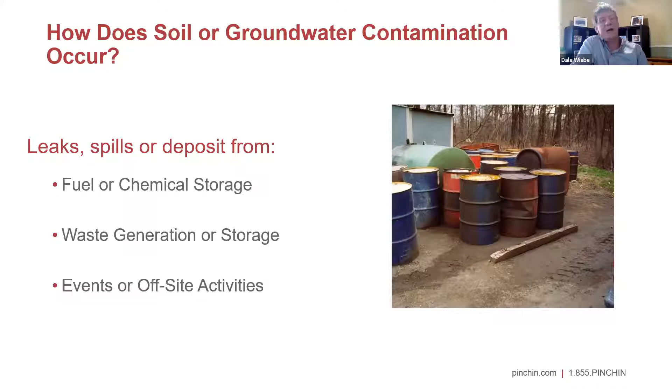Or it's even possible that there could be impacts due to events or offsite activities that aren't typically related to the historical property use, but still have a potential to impact soil or groundwater on the site.

It's not anticipated that every site is going to go all the way through this process. In fact, it's more likely that the vast majority of sites are only going to go through the first step, or maybe the second step, where they get screened out as sites that do not have the potential for significant soil and groundwater impacts. It's only those sites where that potential exists that will be subject to further assessment and further planning.

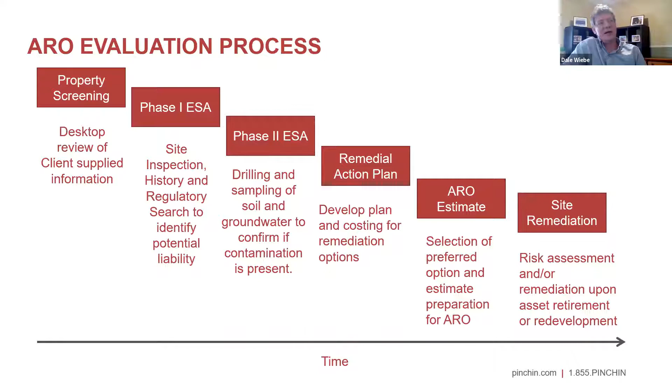As you can see at the bottom of the slide, the farther you go through this process, the more time and resources it actually takes to develop an ARO. But again, that's only going to be sites that actually have the potential for that contamination.

So the first step of that evaluation process is the desktop screening process. If there's a list of fixed assets that you have in your organization, based on all the information you have about those sites, based on property use, your development history, the location, and any other records that might be available for the site...

...the first question that needs to be asked is, is there any reason to suspect, based upon your records, the activity at the site, and the history of the site, that there's the potential for contamination of soil and groundwater? If the answer is no, then really no ARO would need to be assigned for this site. There's no reason to suspect impacts.

And there would be no recommendation to go further through the process. If there is the potential—based on, maybe the development history of a property wasn't known prior to your acquisition of it, maybe there's been some historic activity at the site that does raise the potential for some contamination—then the recommendation would change to yes, and it would go to the next phase of the process.

That next phase is a Phase 1 ESA. Now, the Phase 1 ESA process—Phase 1 is a standard due diligence document.

There is a standard for what comprises Phase 1. The principal components are an information and records review that is much more extensive than the desktop screening, because this involves going to historical records, regulatory databases, regulatory records, and really trying to identify all the pieces of information that might be used to paint a picture of the historical operations and the environmental conditions of the site, going back to the time of its first development.

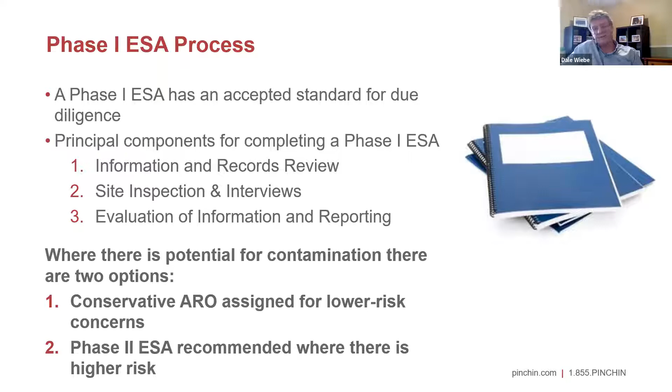So when we talk about risk factors that increase the risk for potential ARO in a property, what are we talking about? We have to ask ourselves some fairly straightforward questions. First off would be, what's the nature of the contaminants that were identified in Phase 1? Not all contaminants are created equal. Some readily move through soil and groundwater a lot easier than others, potentially representing a larger risk for more significant impacts. Some can contaminate soil or groundwater even at very low concentrations, so they also represent a higher risk.

Then there are questions about, well, okay, if these contaminants or chemicals were present on the site, what is the potential that this got released to the environment? That might open up other questions, such as how long was that activity or that storage present on the site? How was it handled or stored? Based on similar sites, generally a consultant will be able to tell you, based on experience, that this type of storage or activity generally results in the potential for release to soil or groundwater.

Another question might be, what is the potential severity if there was a release? So if there's concerns that are very close to, say, the property line or very close to a building, that would elevate the risk, because the potential for liability for offsite migration, or the liability that it could affect the operation of the site building, would elevate the risk and further move it down the process for developing an ARO.

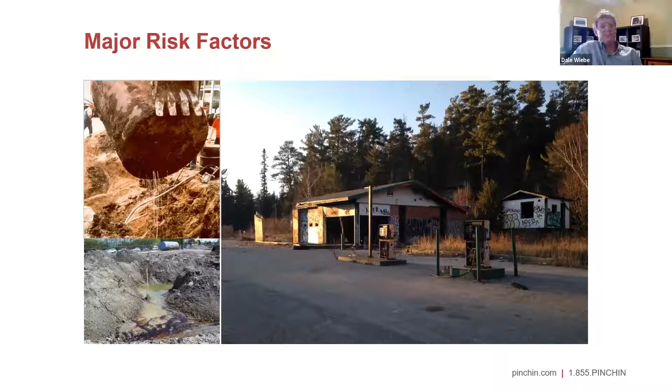So one of the activities that tends to be very high risk is fuel storage and fueling on the site. And one of the highest risk aspects of this is the UST, or the underground storage tank.

One of the reasons these are considered high risk is generally because an underground storage tank is a buried tank. Small leaks, spills, or overfills of a tank that's buried underground are not going to be readily visible to anybody on the site. So these leaks have the potential to go for extended periods of time if they did happen.

They also contain fuel, and this fuel is a high risk contaminant. It passes readily through soil and can impact groundwater, and a fuel tank can generally impact a fairly significant area and represent a significant liability.

So for an underground storage tank, I've got some photographs up on this slide, and this is a public sector building where there's a heating oil tank that had been left on site as an obsolete tank. It wasn't in use, and you can see the natural gas connection that serves as the heating fuel for the building and has for decades, but the original tank was left in the ground.

This is not as uncommon as you otherwise would think. In fact, when we investigated this tank, it was partially full of fuel and partially full of water. That's generally a bad sign, because if water is getting into your tank, that means fuel can also get out of the tank.

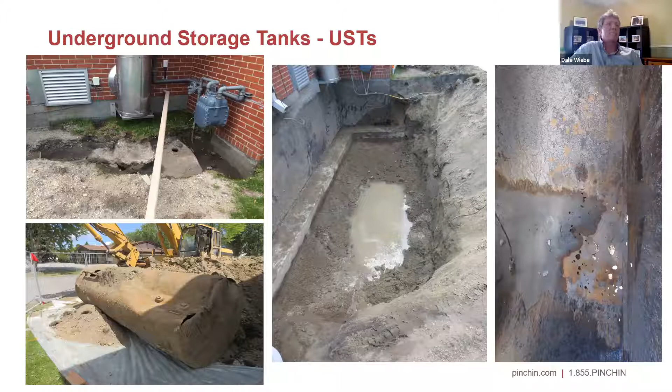So chemical waste and storage. Chemical storage and waste storage today is a much different process and is regulated and handled by industry much differently today than it was historically. Today, the containers, labeling, manifests, inspections, and general storage methods are much higher standard and have a much lower risk of potential release of impacts to the environment.

But unfortunately, historically, that wasn't always the case. Prior to there being environmental regulation for those contaminants, or any type of protocol for how those chemicals and waste needed to be stored, there was a very high potential for release to the environment, to soil and groundwater.

And the more chemical or waste storage that would have been present at the site, so the longer that operation may have run, or the greater the volume of waste that would have been stored, the higher the potential risk would be.

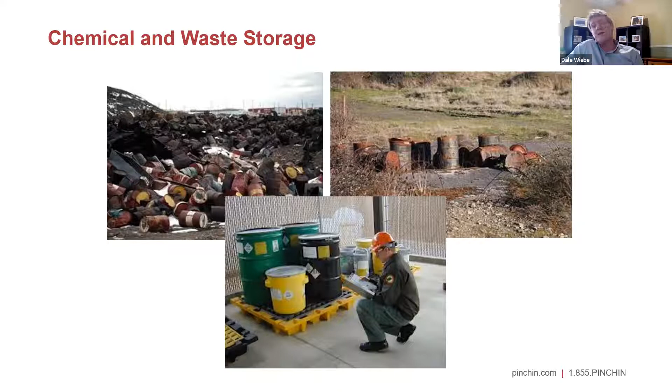During a phase 1 site assessment, there would be a site walkthrough, and one of the things the assessors would look for is staining on the ground or evidence of stressed vegetation. These can be telltale signs of potential release of contaminants to the environment, and if encountered by an assessor during a walkthrough, it's something that could get flagged for further investigation.

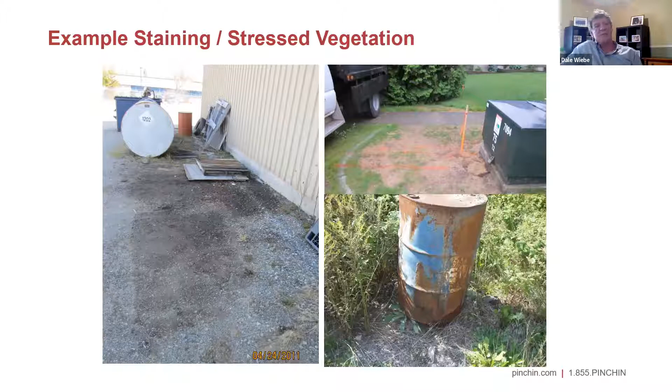Above ground storage tanks contain fuel and are very similar to underground storage tanks in that fact, but above ground storage tanks are lower risk because they do not have the potential to release underground. They would have to basically leak to the ground surface, which is easier for people to observe. We would generally look for pathways for those fuel tanks to possibly reach the ground surface.

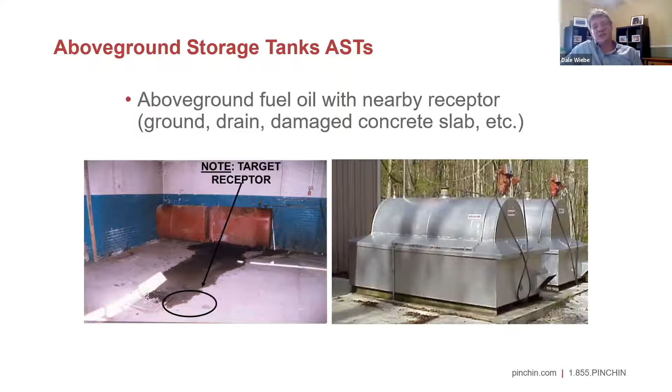So with these risks, we would then look to do a phase 2 ESA. The phase 2 is the actual sampling of the site, to confirm if contamination is actually present. And once contamination is confirmed, it may require more sampling to determine how much of it is there, and to determine the extent and severity of the contamination.

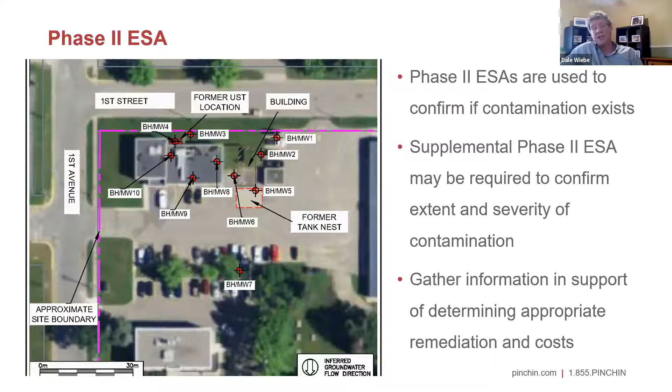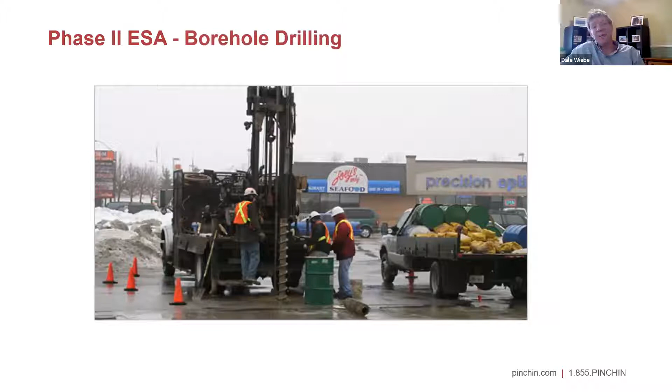We also use it to gather information in support of determining appropriate remediation strategies and costs. Methods for a phase 2 would involve borehole drilling, essentially mobilizing a drill to site, pulling up soil and sampling it to send to a lab to determine condition.

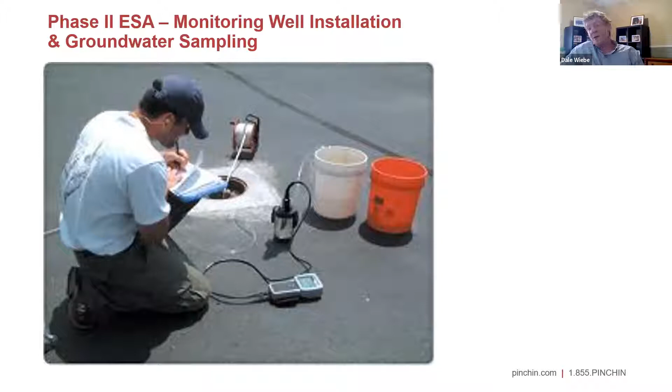With the borehole drilling, we could install groundwater monitoring wells. This is a screen and casing that goes inside a borehole, allowing water to enter the well so it could be pumped out and sampled, and the water quality can be determined.

And possibly even test pits. Test pits are a little bit more disturbance, and you need the correct site to be able to accept putting a 3-foot wide excavator bucket into the ground.

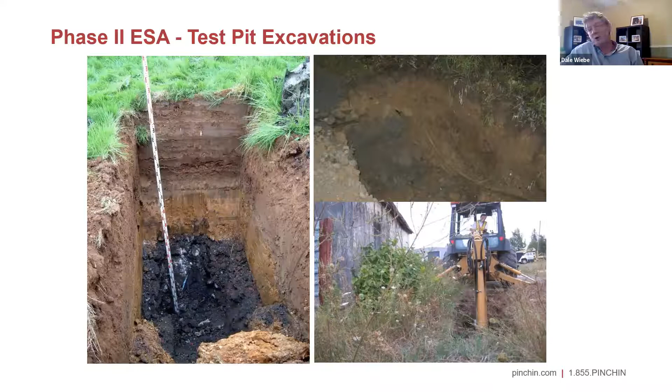You might not want to do that when it's built up with asphalt and concrete, but if the site is appropriate for it, it's a very cost-effective way to do a shallow soil investigation.

So once we've confirmed and determined the extent of impacts, when we're planning a remediation, we want to take certain factors into account. One of those obviously is going to be the total cost of doing the remediation or cleanup.

The potential disturbance to the site that cleanup would involve, this whole time frame of the project, as well as future redevelopment plans for the site.

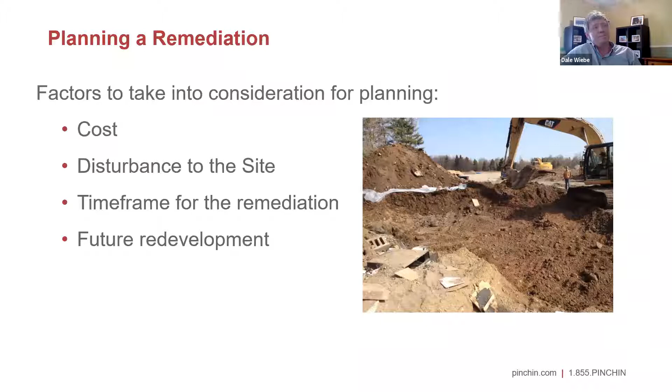So the methods of remediation or remedial strategy: ex-situ means off-site. It's essentially the excavation of impacted soil or groundwater, removal of the material off-site and bringing in fresh fill to replace it.

It's the most complete solution, but it's not always the most practical, because if the impacts are close to buildings that are on site or general site improvements, it may not be practical to try and excavate out all the soil that might be beneath it.

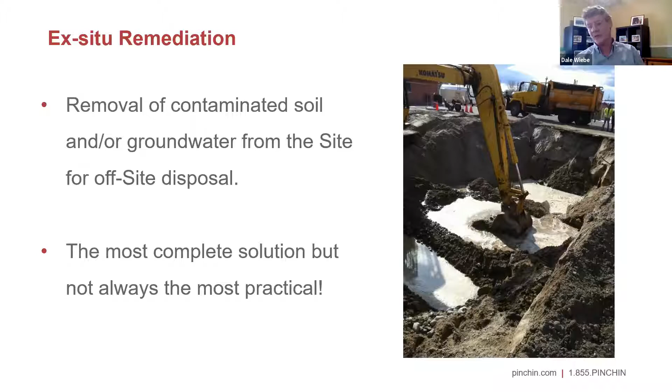Alternatively, in situ means on-site remediation and monitoring. There are natural processes through biological or chemical degradation of contaminants that can lower the contamination level over time.

That's called natural attenuation, and Mother Nature does it naturally, but we can accelerate those processes through bioremediation or chemical injection. This will greatly shorten the amount of time compared to natural attenuation, but it's still a much longer time frame when compared to ex-situ remediation.

But in the end, it might represent a lot less disturbance of material on the site.

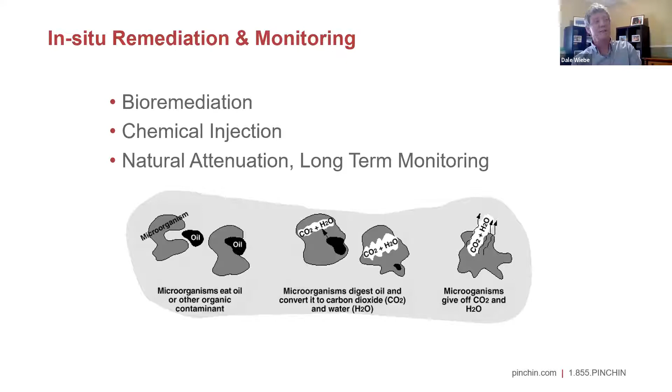And then there's the option for the risk assessment. Going back to the very first slide, I said the standards were developed using a risk-based approach. Those risk-based approach that develop the standards are what's called generic standards. So they don't take into account the depth of impacts or whether it's under the parking lot or under a building.

A risk assessment compiled by a qualified risk assessor can develop site-specific criteria for the property that might allow impacts to stay perfectly well in place, and you may not need to do any intrusive remediation.

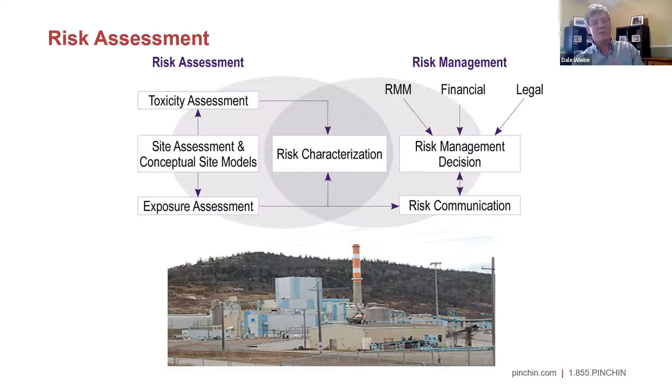And that's all I have for the presentation today. Thanks, everyone.

All right, good afternoon, everyone. Tim McBride, and I'm here to talk to you today about closure and post-closure liability relating to landfill and waste disposal sites.

One of the things we've noticed recently is there's been a real shift in people's thinking regarding landfill sites. And I would hope that your organizations are sharing this trend that we're seeing.

We're getting away from the fact that people just think that this is a dump, and people are starting to look at it as an asset.

And I think part of that is because the realization is becoming apparent to people of what's involved in trying to get a new landfill site, and some of the challenges and the time constraints that go into that sort of thing.

So really, there's been a big movement now for people to optimize their landfill sites and try and maintain them in such a way that they are working towards a closure plan that is a little bit easier on the pocketbook.

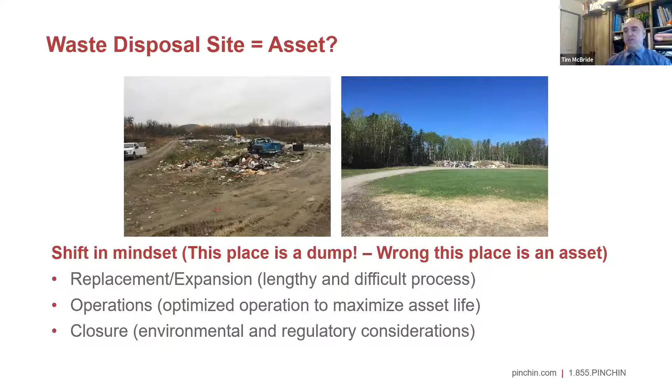And at the same time meets all the regulatory requirements and minimizes the impact to the environment as well.

One of the things we recently did was a feasibility study for a small community of about 3,000 people. We were trying to figure out the best waste management option for this community - whether to invest money in expanding their existing landfill site, try to get a new site approved, or abandon it altogether and look at hauling waste to an adjacent community. In doing that exercise, we pulled up stats on what we think people generate, and typical tipping fees, to develop what it would cost per person per community per year.

We figured that disposal alone would be $60 per person per year. So for a town of 3,000 people, that equates to $180,000 in tipping fees a year. If you have a landfill site with a considerable lifespan remaining, or conversely you didn't have a landfill and had to ship waste off site for disposal elsewhere, that could be a considerable investment - you'd have to expend a lot of money to deal with your waste disposal.

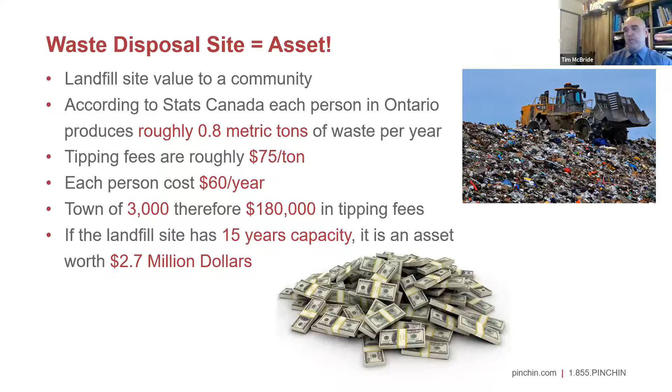In light of that, a lot of people are starting to realize the value of their landfill sites, and they're starting to treat them a little bit better. So in order to figure out your closure costs and post-closure liabilities, you have to have a good understanding of where your site is today.

Most sites have some sort of limitations placed on them, whether that's a limit on the amount of waste you're allowed to receive by volume, or sometimes it's an areal extent - you're only allowed to have a waste footprint of 2 hectares, for example, and most of the time that'll be specified in your license. Sometimes sites have other restrictions too, where you have an approved footprint but there's a limit on your waste height, due to visibility from adjacent properties or other influences, which would have been wrapped into your approval process.

The other aspect is that there's usually design criteria within your regulations - side slopes will be specified at, most jurisdictions being 4:1 with a 20:1 crown on top. So if you have a designated landfill footprint, those design criteria really dictate how much waste you could fit in there. What we like to do is figure out where we're at today, shown here as this green line, get an idea of what our approved landfill cap or volume would be, and what's the available airspace remaining. This particular example is actually a proposed expansion, so we could figure out how much additional waste we could get and convert that into years of life.

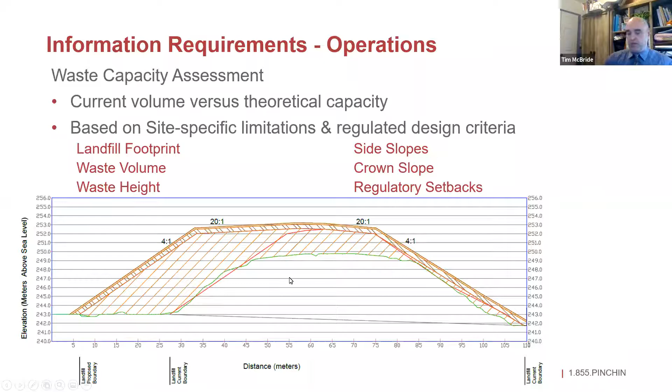One of the ways we do that is through annual topo surveys. Lots of sites have scales, and that's all fine and dandy, but the weight you bring in doesn't always translate well to in-place volume. So if your site doesn't receive a lot of waste, we wouldn't do it annually, but we do frequent topo surveys, and using that we can calculate what your average waste deposition rate would be.

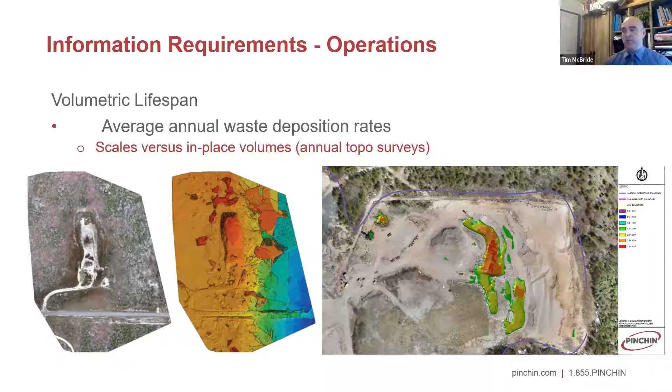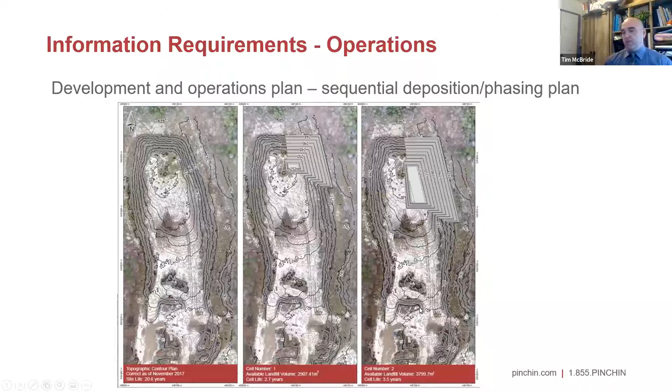Then what we'd like to do is develop a development and operation plan for the site, which helps us figure out a way to maximize or optimize the available airspace left in the landfill site. This is an example of the current site condition, phase 1, phase 2 - there's a method to how we develop the landfill site so that we can cap it as we go along and optimize the amount of waste we put into the site.

Combined with the annual topo surveys and the available airspace developed through the waste capacity assessment, we figure out the lifespan of the landfill based on volume. The other important component is the contaminating lifespan of the landfill site. Similar to what Dale was talking about, where you have contaminant sources, the landfill itself is a huge contaminant source. As precipitation falls and infiltrates through the waste deposits, you end up with leachate generation, and that leachate generation follows the groundwater flow direction.

Either your site operates as a natural attenuation type site where it flows and dilutes itself, and other hydrogeological processes occur and manage the plume, or you would have a leachate management type facility where you would pump it and treat it.

The default contaminant lifespan for most jurisdictions is 25 years post-closure. So even once you're done with this landfill site and you put a cap on it, you're not done with it. You still have to carry out the post-closure period for a minimum of 25 years. Often we run into sites where the contaminating lifespan exceeds that 25-year period, and we have to account for that.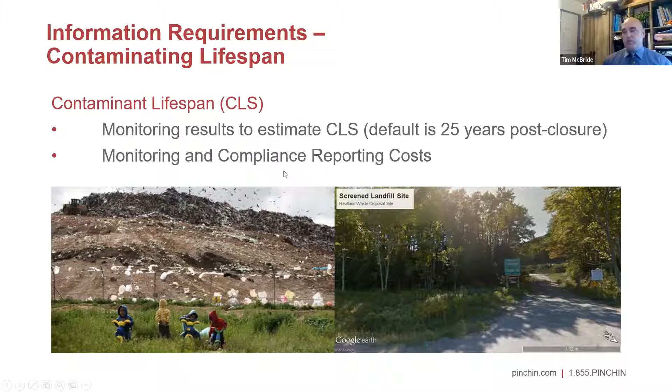So the last piece of the puzzle is the closure concept. Once we understand the asset and the life of the asset, what is our strategy at the end of the game to close the site? Most jurisdictions require you to apply some sort of impermeable cap on top of the landfill site and then vegetate it as well.

The other financial aspect that's really important is if you progressively close your landfill sites as you finish the cells in accordance with the sequencing or development plan, you don't have to carry those costs in your post-closure liability because you've already closed them. So it's really important, if you can, to try and develop and close the site in a specific sequence, so you don't have to account for that in the long run.

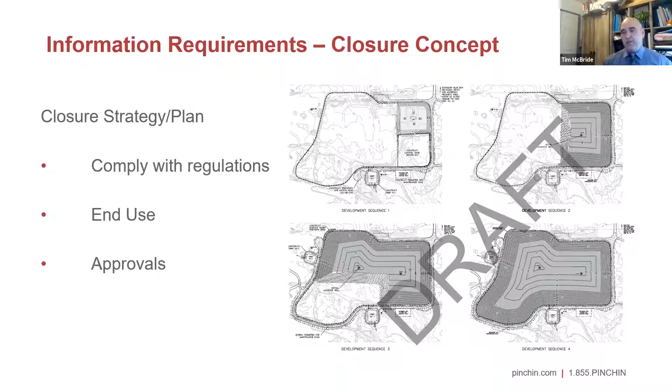Sometimes the closure plan will be derived by requirements in your license. It'll dictate what you're allowed to do for end use. When these closure plans are required is sometimes problematic as well. Some licenses say you actually only need a closure plan submitted when you're within 2 years of closure. However, it's really hard to do your closure cost estimating if you don't know what the plan is at the end of the day, and it hasn't been approved by the regulators.

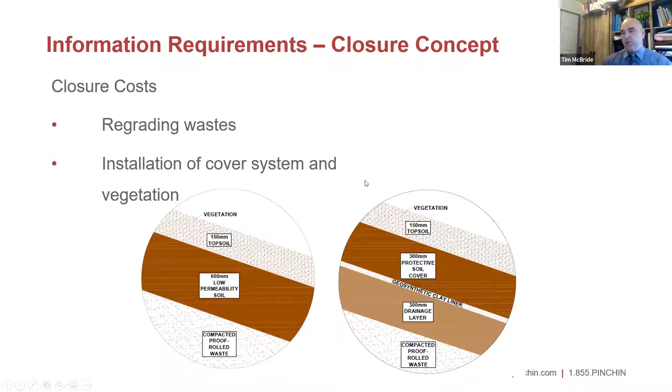So most closure involves putting a low permeability cover system on top. Real simple: you shape your wastes to the approved contours and slopes allowed in your jurisdiction, and then apply your cover system. Sometimes that could be as simple as putting 2 feet of clay that's properly placed, put in lifts and compacted to certain specifications to ensure you get the impermeable quality. Or alternatively, if you don't have clay readily available in your area, you can use a geosynthetic clay liner with other more locally available materials.

For the post-closure care period, there's certain things that are required. Like Marcus said, we already have an accounting standard for landfill liabilities, so within that, it dictates a lot of the stuff that we have to account for.

Final cover and vegetation inspection to make sure your landfill cap is performing according to plan. Any other infrastructure you leave on site has to be inspected and maintained, whether that's roads, fencing, or your groundwater monitoring network. And then, of course, with that contaminating lifespan we talked about, you also have to provide an allowance to maintain and monitor your groundwater monitoring network.

Lastly, there's also a contingency formula built into the existing standard that you have to apply to account for ongoing issues, if you were to have to buy additional lands or entertain a less passive treatment system.

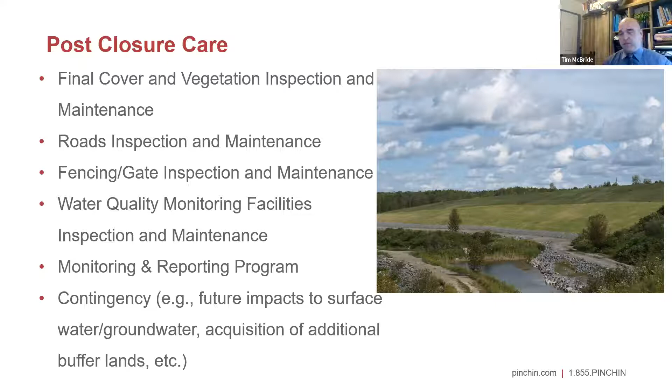So your change in liability—we typically do this for our clients on a year-to-year basis. This is usually how we present it: we figure out what the total cost for the landfill closure and post-closure period would be. We apply a capacity factor, so if your landfill was only 50% full, we would only require you to have 50% available at this time. And then we also have what you had on the books for it last year, so we show how much things are changing from time to time.

So this is an example of the cost sheets that we do for closure care estimates. Here we have a landfill site that has a relatively small landfill footprint, 1.38 hectares. So what we've done here is figure out what the costs of regrading the waste would be. That's the top line.

Then the next line is application of the clay cap and vegetation. As you can see, that cost starts to climb pretty quick. And as you can imagine, this is a small landfill site—once your landfill sites get bigger and bigger, there is a bit of an economy of scale in the application and earthworks, but at the same time, this number can really start to climb quickly.

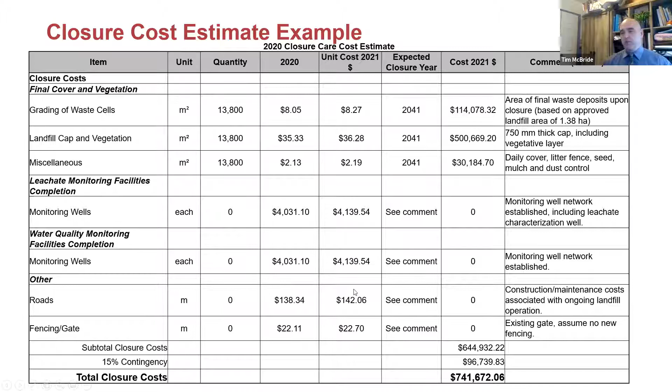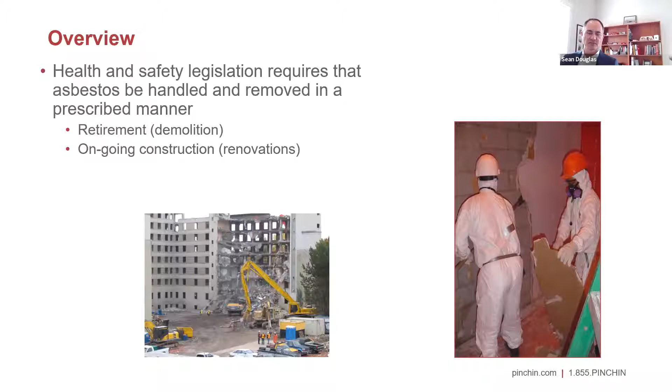So a bit of an overview on hazardous materials. Under the scope of the PSAB, because asbestos is required to be handled and removed in a prescribed manner, and it's legislated under provincial health and safety legislation, whether that's retirement of the building, demolition, or ongoing construction or renovations, asbestos needs to be accounted for in the ARO.

So what is asbestos? Asbestos is used in many building products because of its insulating properties, its fireproofing capability, and its strengthening capabilities. It was used in many building products over a long period of time, from around the 1940s to about the mid-80s. Even after that, it was used as well, but the use became much more limited.

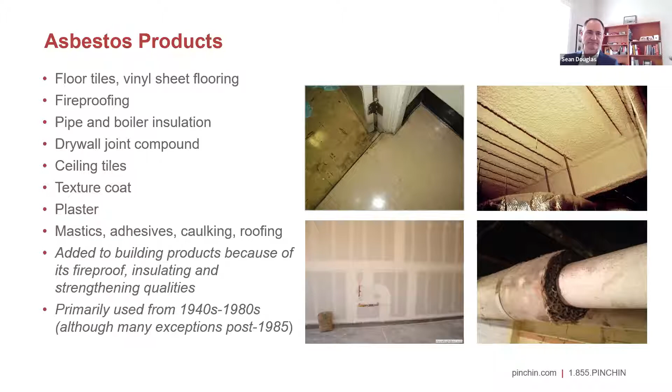Not only is there asbestos, which could create significant liability to the building when it's being demolished, there are other hazardous materials which need to be considered, particularly lead paint, PCBs, or mercury.

Lead paint was pretty common up until about 1978. It was added for durability reasons.

PCBs, or polychlorinated biphenyls, were used as a cooling liquid in transformers and capacitors. They were even used in non-liquid forms, like caulking and paint on the exterior of buildings - we've seen that as well. That was pretty common up until 1980, when PCBs were banned.

And even things like mercury, to a lesser extent as far as environmental liabilities are concerned, things like control switches, thermostats, and fluorescent light tubes.

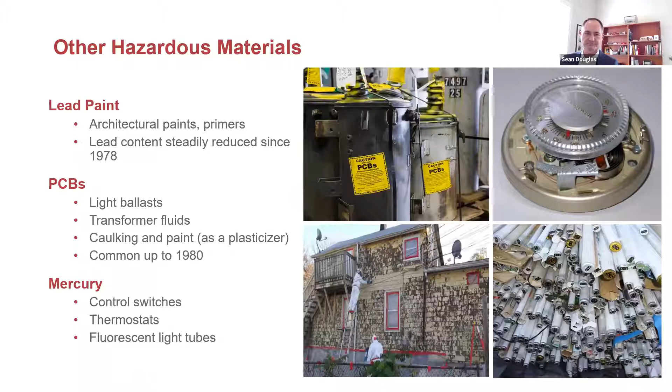So a bit about understanding the remediation and costs in relation to asbestos and hazardous materials. Asbestos remediation tends to be the most significant cost for asset retirement, and it does have ongoing costs due to maintenance and renovation activity, whether you're refitting a building or just doing regular maintenance work - asbestos does actually add to the cost of that as well.

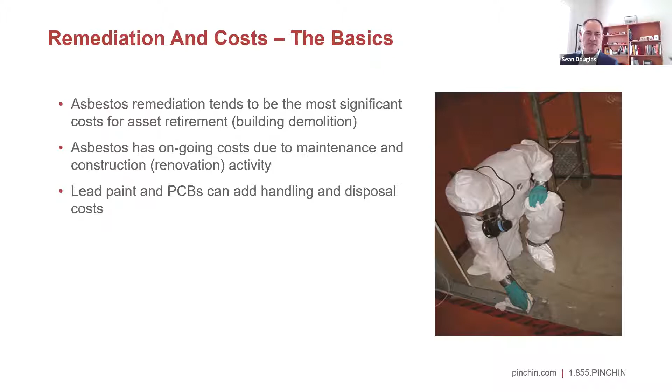Lead paint can add additional costs, as well as PCB disposal, which can add handling and disposal costs for environmental liabilities. One thing that's important to note is that there are remedial costs associated typically with asbestos and the other hazardous materials, and it does vary quite a lot depending on the type of material you're dealing with.

Provincial regulations are very specific to how that material gets handled, and it can vary from region to region, province to province. Even market conditions can affect how the costs are calculated for handling and disposing of asbestos and hazardous materials.

And the accuracy of the estimate ultimately is highly dependent on the thoroughness of the investigation that took place and the experience of the estimator.

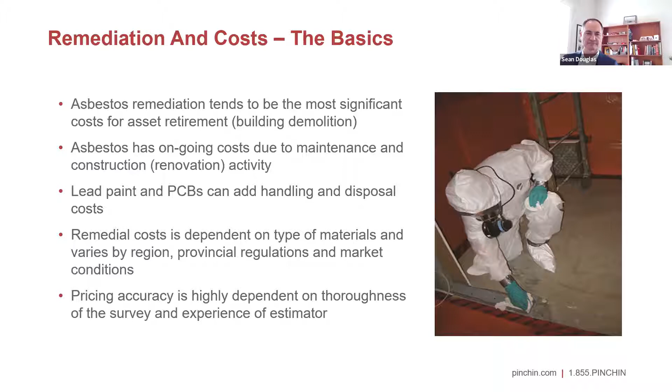So a few more basics around remediation costs. Typically, we would provide costs which are based on current pricing. Using the quantities available in the investigation, we would apply unit rates to calculate remedial costs.

And then we would add contingencies to address some items that may not have been sampled, or some specific exclusions in the reports, or just gaps or other assumptions in the information.

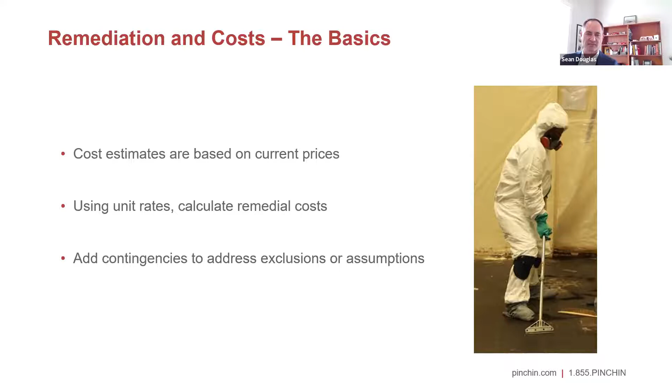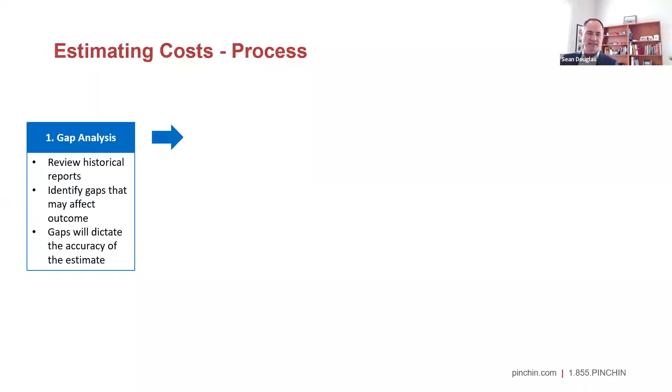So I've put up a step-by-step process on estimating costs. The first step is to assemble all historical reports on file, whether those are environmental reports or previous asbestos assessments. That needs to be provided to the consultant or expert, who would review it and highlight any gaps. Those gaps will ultimately dictate the outcome of the estimate.

Then we move into the assessment phase, which relates to site investigation, sampling of the materials, taking quantities of those materials on site and through drawings, laboratory analysis to analyze the material, and then data management.

The third step is to apply unit rates to those quantities, but also factoring in local conditions and regional considerations, and ultimately using professional judgment and experience.

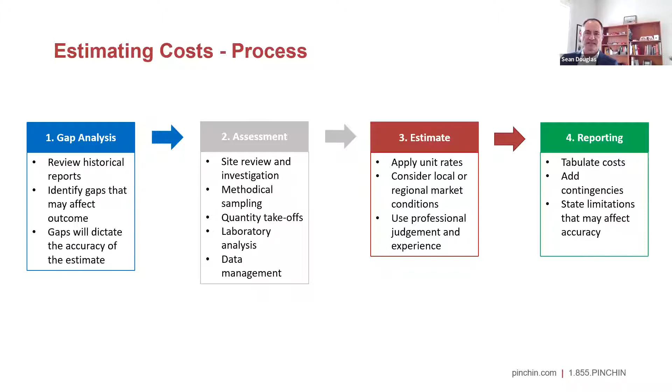And the fourth step is reporting, tabulating costs, and then stating any limitations that might affect the accuracy of the estimate. So I'm going to run through a few examples here of calculating estimates for asbestos and hazardous materials.

The first one is what I'm calling a simplified modeling method. This is where the asbestos inventory is very limited, there's not a lot of information available, and what we're doing is modeling against buildings of similar use and size.

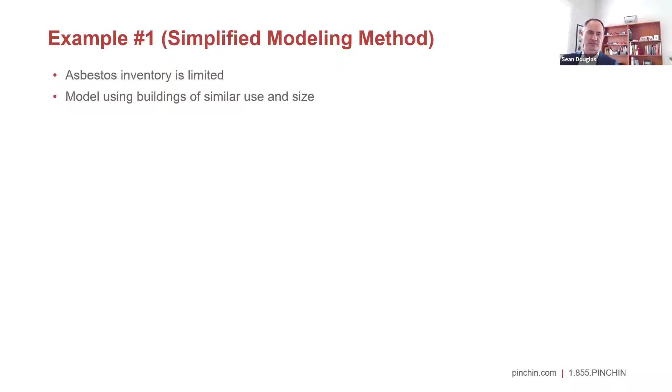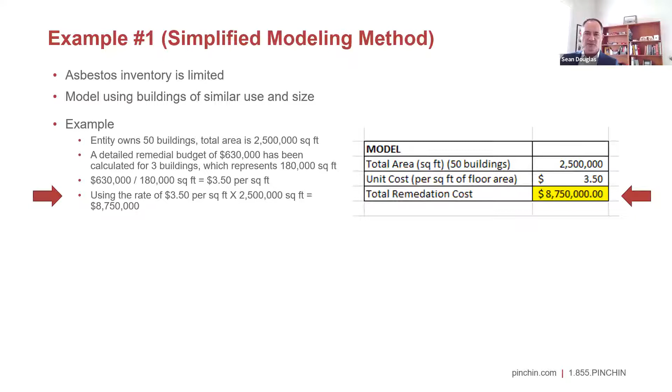As an example, if the entity owns 50 buildings with a total area of about 2.5 million square feet, and at some point a detailed remediation budget was calculated on 3 buildings representing about 180,000 square feet at a value of $630,000, you could do a simplified calculation to work out a cost per square foot. In this case, the cost per square foot was $3.50 on average, and multiplying that by the total area gives a total remediation cost of $8.7 million.

Obviously this is a very oversimplified method. It makes strong assumptions that there are similar asbestos products and types within each building, and that the building construction detail and configurations are similar. So at the end of the day, the variability is very high with something like this.

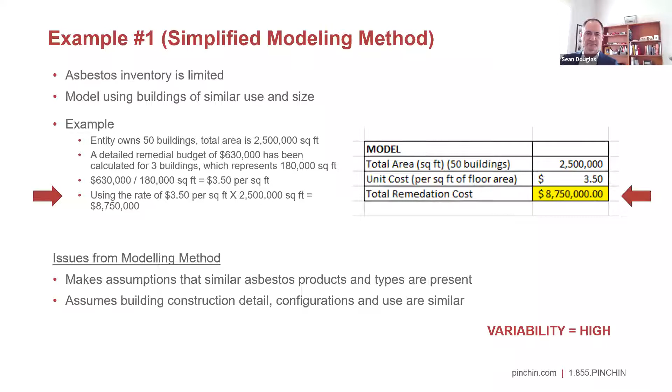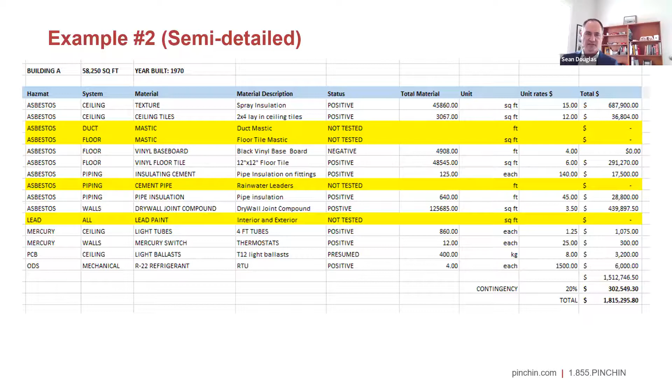The second example is a semi-detailed method. This is where we've already conducted an assessment on site and sampled quite a lot of materials. You'll see on the screen some of the materials investigated, their status—positive or negative for asbestos—the total quantity of material, and the unit rates applied to that. As you can see, some materials weren't tested, particularly the ones highlighted in yellow.

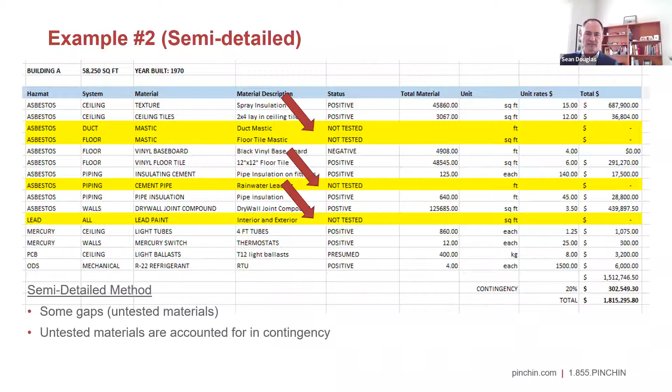This was maybe because it was limited as part of the investigation, so we didn't apply any costs for that on a line-by-line basis. However, we have accounted for a contingency to cover off some of those untested materials. In this case, about a 20% contingency was added to the total estimate to calculate the ARO.

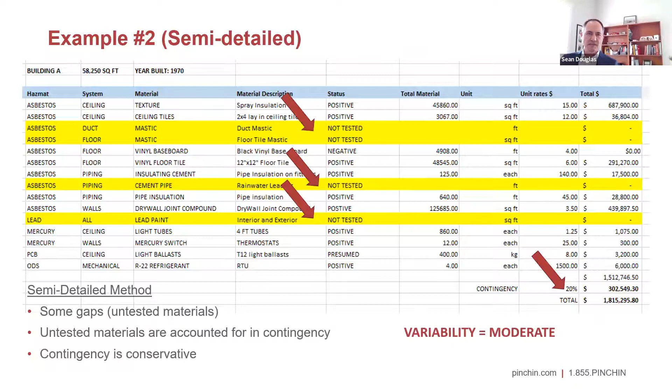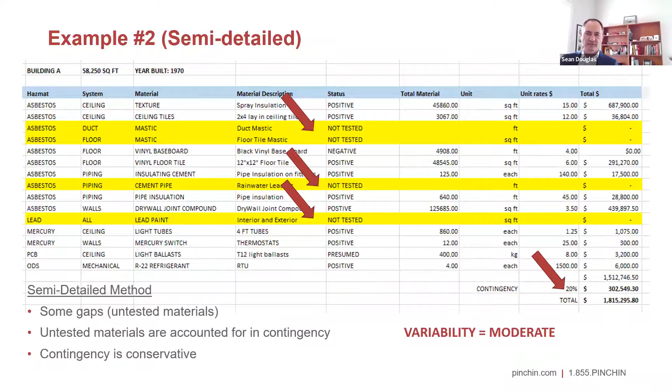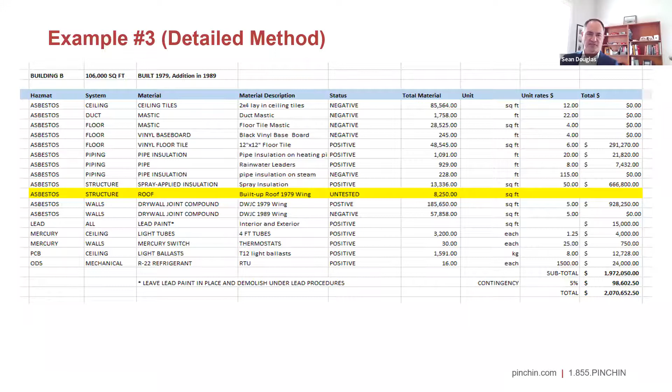As you can see by this list on the screen, the investigation considered pretty much everything in the building, except for one item—the built-up roof in one part of the building. The 1979 wing was not tested, and there could be various reasons for that. It could have been an occupied area we didn't want to test at that particular time, or the client didn't want us to test it. So that item is left unaccounted for.

In this case, the contingency we're applying on example 3 is fairly low because we've got pretty detailed quantities and information in the inventory. So at the end of the day, the variability is pretty low, hence the low contingency value in this example at 5%.

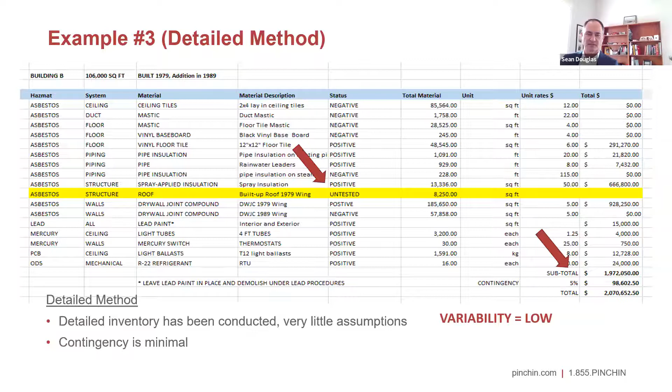In summary, with regard to calculating the ARO for environmental liabilities around asbestos, the key points are to make sure a gap analysis is performed and all the information is thoroughly looked over. Understanding the local market conditions, the regulatory landscape, and the experience of the subject matter expert or estimator will ultimately dictate the accuracy of that estimate. And finally, if you have incomplete data, that will likely deliver conservative estimates.

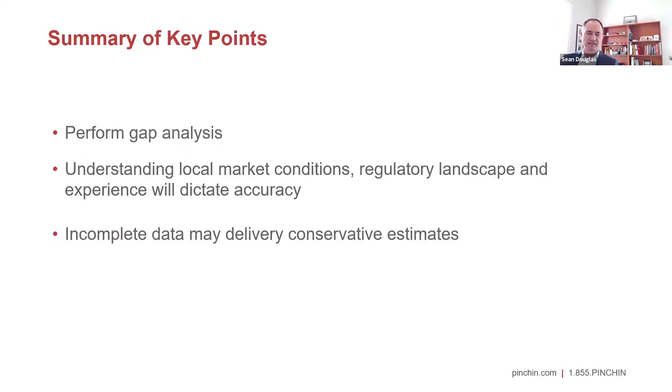And that is it for me.